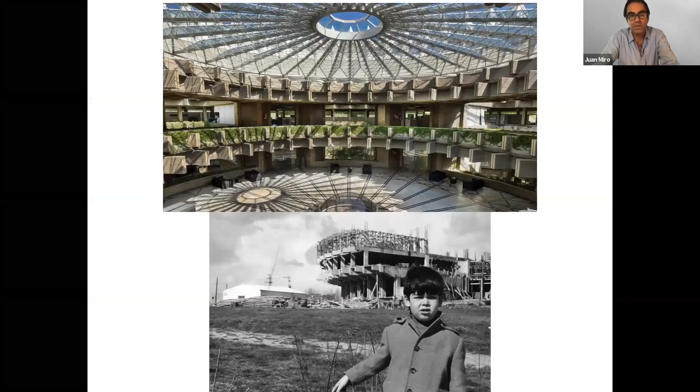The interesting thing about my father's influence is that he was European, very much influenced by Frank Lloyd Wright's modern version of architecture. He was an admirer of Frank Lloyd Wright and organic architecture, and applied that in many of his projects. He was also terrific at sketching and drawing. I love sketching, and I always thank my father because I grew up seeing all his drawings around. It's something I still value a lot - the sketching and the ability to express a project just by sketching. You can see here similarities with some of the interests Frank Lloyd Wright had.

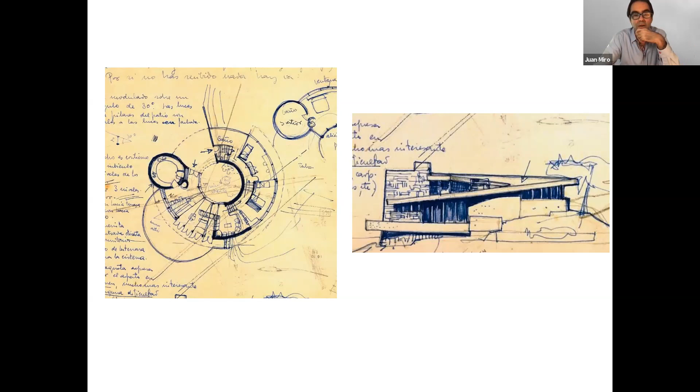And the email never came back, a return, because he basically was already in the hospital.

It's also a relationship that I value a lot, because both Gwathmey and Sorkin showed me a dimension of architecture that is different than the one you learn in the professional world. I think it's very important to be open-minded. When you're a student, you have professors who open up your mind to ways of thinking about architecture that aren't strictly the way you think about it when you're in the profession. I will thank Michael Sorkin for that.

Gwathmey was the architect I met also at Yale, and then I went to work with him in New York. I worked with him almost 6 years—a very important architect in the US. But the curious thing is that he was the American architect very interested in the European vein of modernism. So we have the European interested in American modernist ideas, and the American interested in Le Corbusier and the modernism that came with that. It was for me a very interesting combination, comparing all the things that accumulate as you evolve in your design and your thinking.

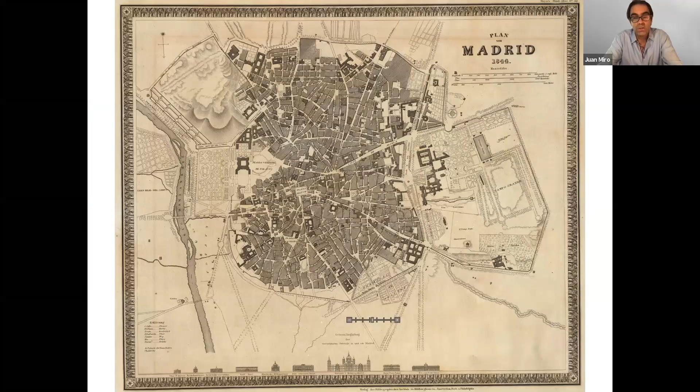There are many reasons for that, and this is one of the things I wanted to introduce to give you a sense of where a lot of the work comes from. When you think about a city like Madrid, this is how Madrid was when Austin was being founded and starting to grow. Madrid was very compact because it was a walled city, like medieval cities in Europe. It was walled, very dense, because it had to keep everything safe inside the walls. The city grew very dense, and it's obviously very attractive when you visit it now, because it has that picturesque sense of discovery. Order was created by carving it literally out of this very chaotic fabric, and it's part of the DNA of the city that remains to this day, building a city with higher density.

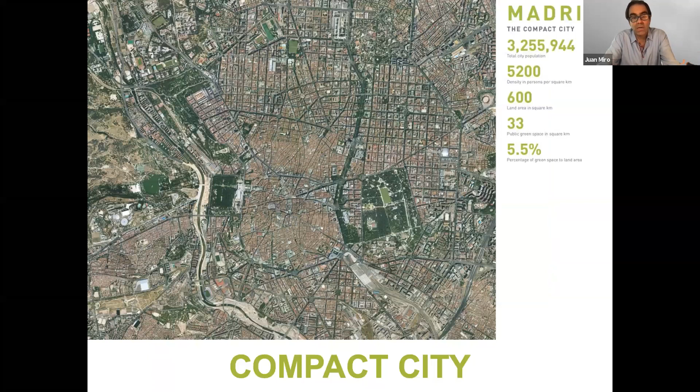So Austin and Madrid have very much the same surface, but in Madrid there are five times more people living in the same amount of space. So a landscape city like Austin has a central part, the downtown and the university, and then pretty much all around east, south, north, and west is like an urban forest that surrounds this central part.

And that has played a critical role in the work that we have done. So the work we have done, in a way, relates to the place that we are, and this city is different than all the cities. So a lot of the work that I'm going to show is more related to work done in Austin rather than other work. We do work also in other places outside Austin, outside Texas, but I concentrated on this for this lecture.

And the thing that also was typical in American cities is that there was a very reverential connection with nature. Nature was revered. What they built was very much trying to integrate themselves with nature, and nature was very much at the heart of every decision making about what they built and where they built it. So the pyramids were recreations of the mountains with temples on top, the same way that there were altars on top of the mountains. So there was a sense of reverence, connection, and integration.

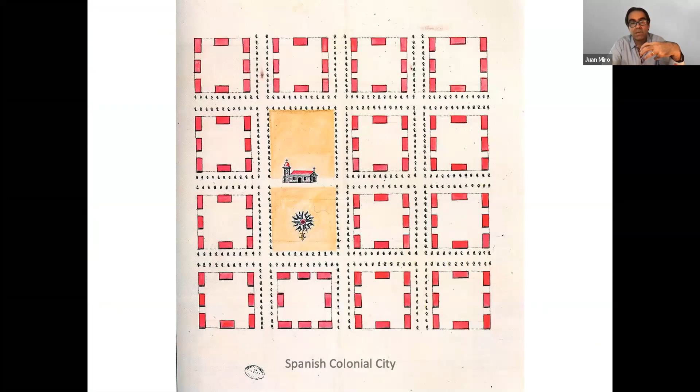So the cities were not closed cities. This is a very important thing, very different from European cities, which were walled cities. American cities, with exceptions along the coast in the Caribbean and Florida, were open cities. An open city meant it could expand into the landscape. This happened to cities all over the Americas, not only the US, even before the Spanish and the English arrived.

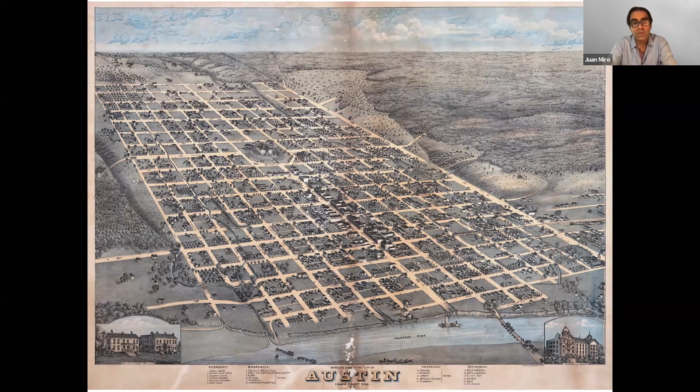So Austin was laid out with a grid too, a grid that can expand into the landscape. As that grid grows, it becomes the city that is now basically Austin. When you look at these early maps of Austin, you realize that since the beginning, Austin has been an accumulation of single family houses.

So single family houses have dominated the essence of the city from day one. There's a grid and the grid grows. And when that grid grows, it keeps blending itself with the landscape. And as it grows, it becomes planted with more and more trees. So the forest that is created with the city is not the forest that was there. This forest is created by the growth of the city. And it becomes a very attractive place to live.

And this was attractive before the pandemic, and is becoming even more attractive now when you think about the connection with this environment. So when you look at this, you say, well, I would like to see what it's like to be under those trees. And this is one of the things that we have done in the book, documented a lot of the windows into the fabric of the city.

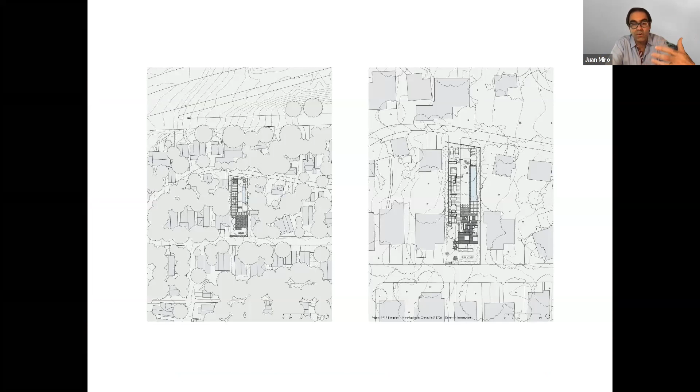When you look at this on the left, you can see a pretty dense part of the city, the older part of the city. And you can see that the lots are very narrow, but you can still create that moment of your own kind of Arcadia in the back of the lot. So for example, this house on the right is where my partner Miguel lives. It's a bungalow from the late 19th century. And then he added to it and worked around the trees.

So those images that you see from above is basically where people live under these trees. It could be very modest lots, it could be very large lots, it can be on a hilly part, it can be in different places, but it's a very strong connection with nature. And this is an opportunity that those trees allow.

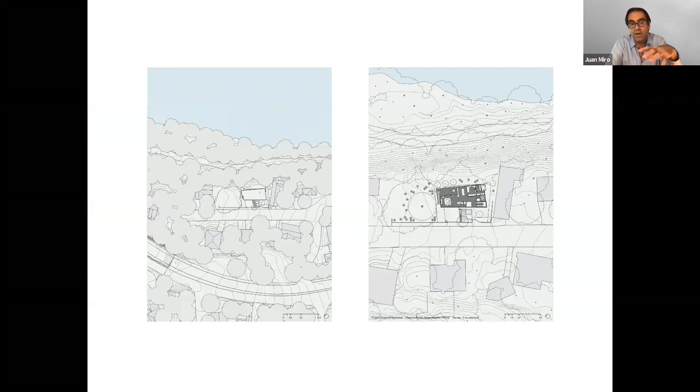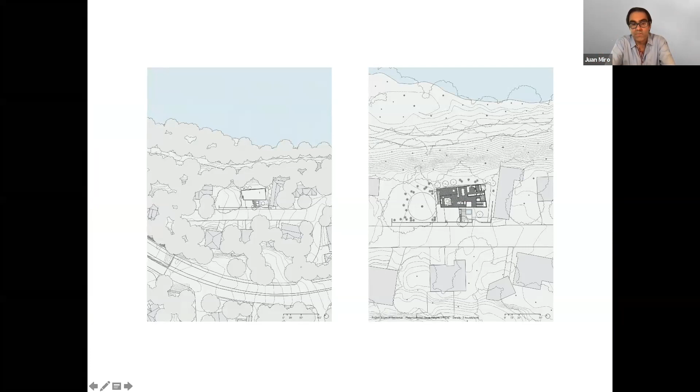So it doesn't matter if it's next to the river, small. This, for example, is an area of town that was surprisingly next to the water, but very modest houses, very small, very disconnected because there were not that many bridges across. And the ability to be immersed into that environment is one of the things that is very attractive about living here. So as I said, the houses can be very small, very modest.

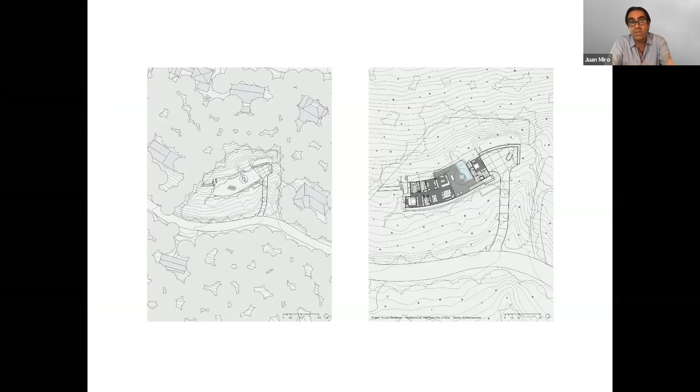It could be in hilly terrain. In this case, we had to build this following the contours, trying to save the trees, with very strong regulations to try to save the trees. So this is a very important part of building in these environments, that there are a lot of regulations to control what you do and what you can and cannot do.

So the ability to connect affects the way that you design these houses and the way that you have to respond to the specific conditions that you find. For example, this is my own house. It's not conventional around this neighborhood to have courtyards.

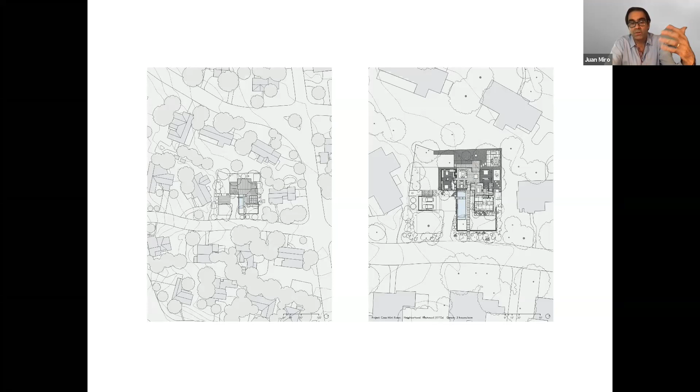We put walls on the front, and we created spaces that allow us to create that sense of privacy, the sense of connection with the trees, with the views. We frame windows, we use windows to frame that connection with the landscape. It's a very narrow, very shallow lot, so you have the ability to connect with that outside space.

And this is something that we do in our architecture a lot. How do you frame that particular view that gives you that sense of connection? You can have a painting, you can have a window like this, and it's basically creating that connection. You can do it also with a larger piece of glass, but when you have those trees, you want to have that connection as much as possible. You can use water. You have courtyards also wrapping around, but there is a sense that you are trying to take advantage of that beautiful connection that we have with the natural environment.

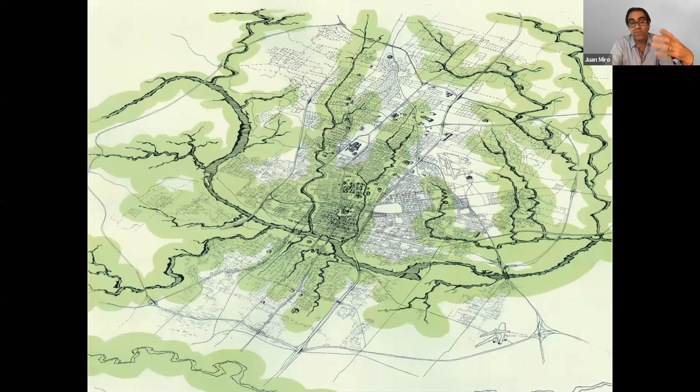The natural environment in Austin is very important in terms of the way it can be developed. There's a lot of floodplain issues, a lot of waterways. So the water is a very important factor. And when you think about the way the city grows and expands, the rivers and the flows of those moments create also great opportunities.

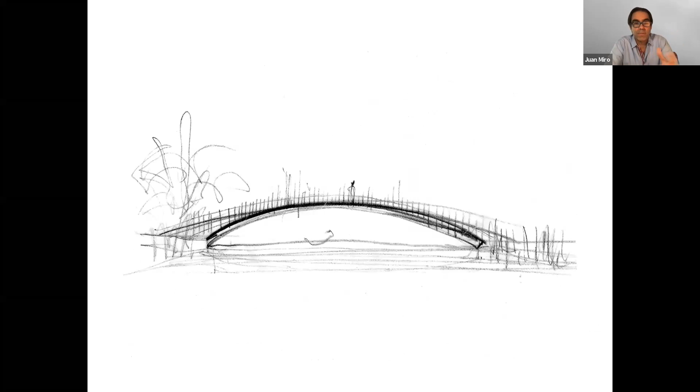The notion of lightness is indeed behind a lot of the thinking that we do. This next project is a good example. We had a very particular site where we had to connect two parts of a parcel with a bridge. These are some of the sketches done when you are thinking. I tell my students always think about how quickly a sketch gives you a sense of understanding of the place. When you look at this, this is the sketch that publishers like to publish, but I like the messiness of where it happened.

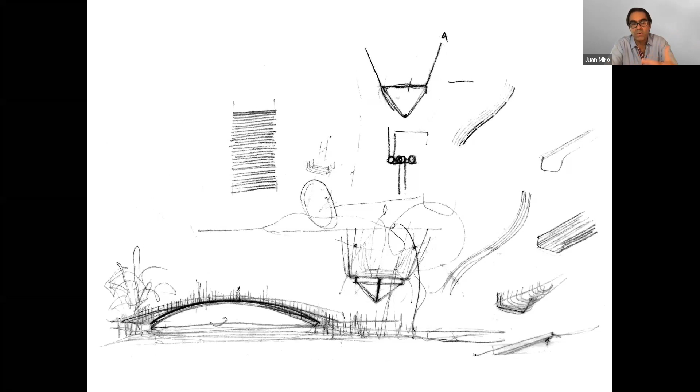This is what happened when we're having conversations. Miguel and I share a desk, we have an office together, and we can be sketching at the same time. Sometimes we're all sketching around the same sketch. It's a very informal process, but you get the thinking happening, and that becomes a reality. You try to maintain that sense of lightness, because the environment is very beautiful and you're trying to respect it and connect with a light touch.

So the notion of the light touch, this is all made with rebars. This is a learning lesson I had from my father. The space I showed you at the beginning, he used simple rods to build those trusses. And I said, well, we can use those same rods to build this bridge. So you don't know where the influence may come from, but sometimes that influence can be dormant in your head until the appropriate moment happens.

I like the evolution of how this changes over time, coming back ten years later, and the way it ages, the way nature starts engulfing it, and how its presence can be much more noticeable from one angle. When you see it sideways, it can disappear more. The vegetation changes dramatically—you can see that all of a sudden ten years later, but the presence of the bridge becomes even more mimetic. It feels like it's blending with its environment, like it's been there all along. That sense of lightness, we like a lot in terms of blending and integrating.

This is a bit the theme of the first part of the presentation, when I was talking about the effort of integrating yourself, trying to blend the pool and the water of the river, and then the bridge goes away, and it's a great moment when that happens. Then you go back another time of year, and the bridge's presence is there. There's a sense of lightness, but also a sense of presence. There's nothing better than that sense of human intervention in a beautiful landscape—it's a very beautiful moment, even when it's very subtle.

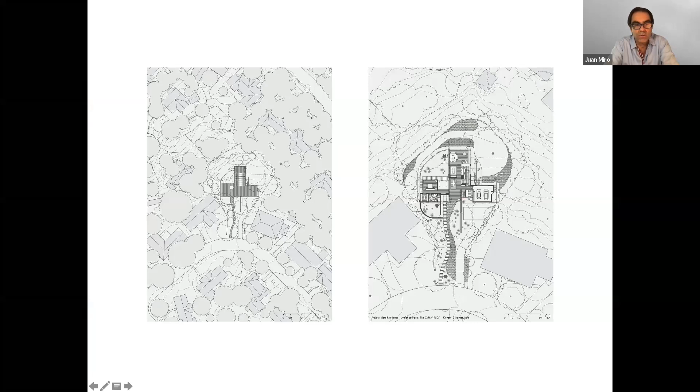I want to show how many houses there are around this one. There are a lot of houses all around, but you try to create that privacy with a wedge lot. So there's a big house on the left, a big house on the right, and you try to hide and create that space. Courtyards allow you to do that. Walls allow you to get privacy.

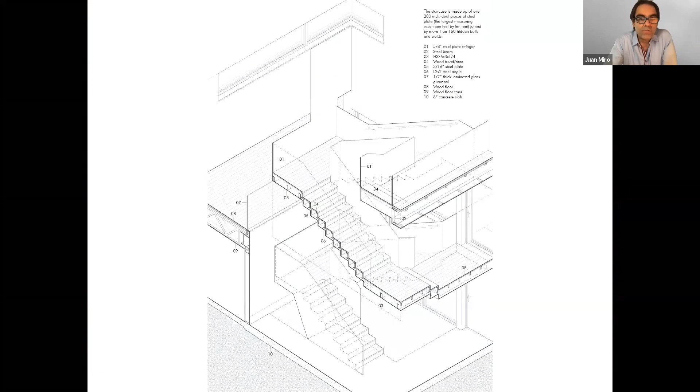And then you start framing the views, like the inside courtyard in this one—the notion of the stair as a sculptural element. This is something we included in the book, a lot of drawings that explain the technical aspect of how this is built. But you can see that the idea of creating your own private space, even if the houses are very close to each other, can be achieved with the use of vegetation and smart orientation.

And in this case, almost like the Mayan temples, you try to get above the tree canopy. So we did a room at the top here. This is the way you access the top—there's almost a reward at the end of this very sculptural stair that gets you to the top, and you have a fantastic view over the treetops, and you get that sense of almost like a forest that is an ocean.

It's basically a green canopy, constant all the way around the central part of the city. So when you look at this, you don't realize there are houses all around—it feels like the middle of a park. But no, it's all full of houses all around. This is one of the advantages of this urban forest, that it can make that disappear.

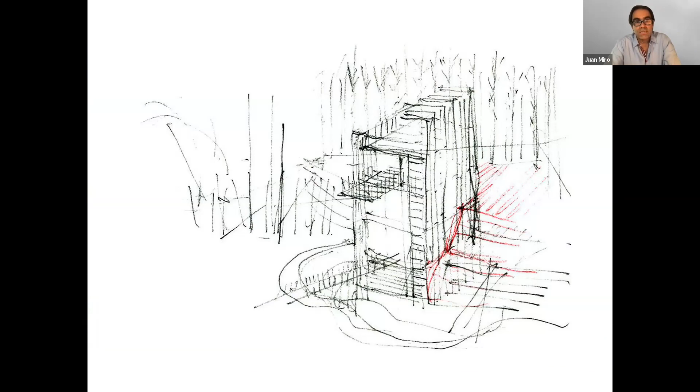This is another example of a house trying to top over the trees. This is the sketch that generated it, and you can see why this house is called Vertical House. This is the only project that is not in Austin, it's in Dallas, but a lot of what I said applies to Dallas and to most cities conceived in the 19th century in the US—these relationships are very similar there.

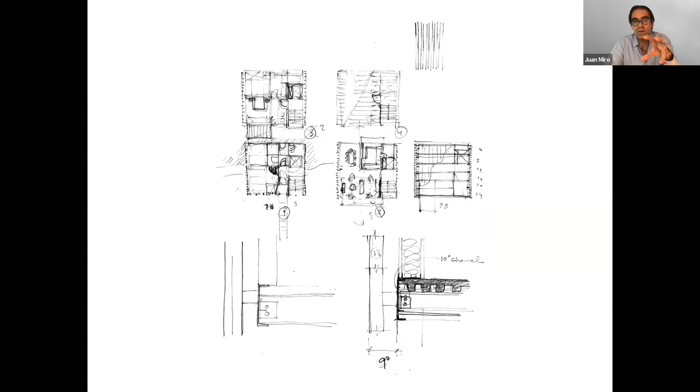The house is vertical to try to maximize that moment of getting above the tree canopy. I don't have time to get into a lot of details, but I wanted to emphasize sketching as a way to capture the essence. These sketches Miguel and I did after flying back from Dallas, after meeting the client, and the essence of the house was conceived in that sketch.

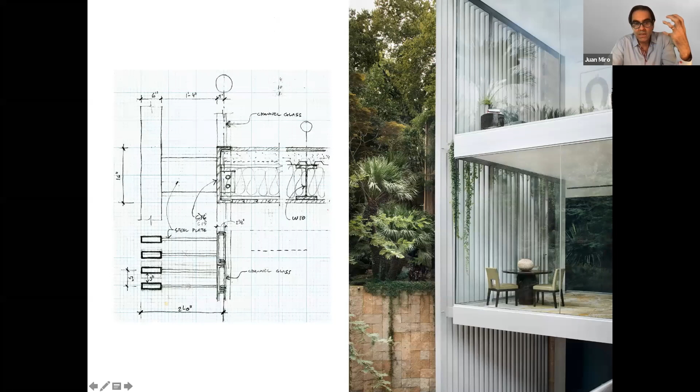So this is the effect. These are some of the drawings we included in the book—we did a lot of these to explain very carefully. The book is full of construction drawings that explain how this is built. It's like, how do you do this? When you look at the image on the left, that's the sketch that conceived it, but this is the final product. How we were able to do it is something we wanted the book to explain—there's a didactic component to that.

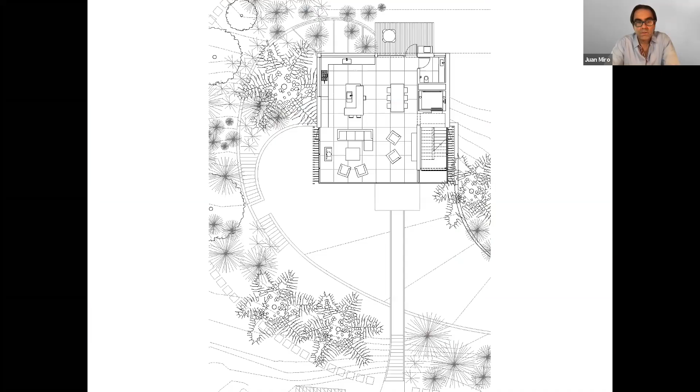So just to complement this, I wanted to say that cities need other things. You need your domestic spaces where you have your personal shelter, your refuge, your place to go back to. And then there are places where you need to meet with other people—in cities we need public spaces, pedestrian streets, meeting places, landmarks.

This is the other component that is now being shaken by the COVID crisis—we cannot meet the same way that we like to meet. There's a need for cities to complement this connection with nature with opportunities for people to do the other things needed in this kind of environment. So it is very much a learning experience.

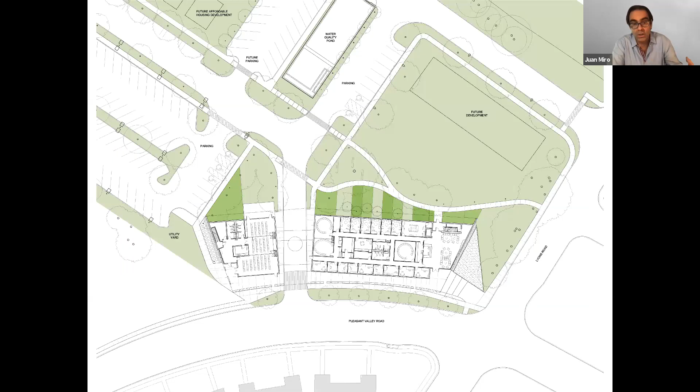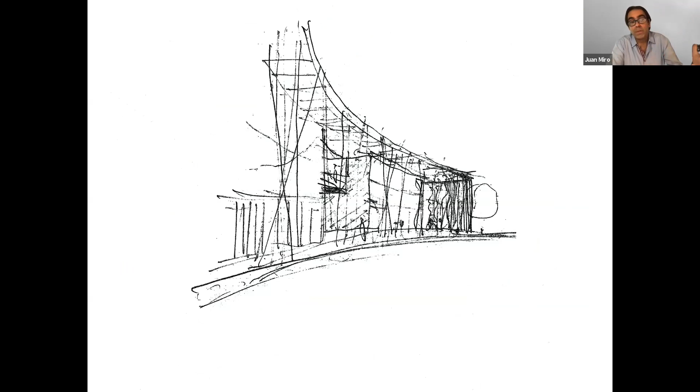For example, the city of Austin is learning how to build along the streets without pushing the buildings back with parking. This project is very much about emphasizing that connection—the idea of building the building to the street is the essence of this project. You can see how the building embraces the street and creates a very welcoming porch. This idea makes the building friendly to the neighborhood, but at the same time creates opportunities for people from the inside.

This is for a nonprofit doing work for very disadvantaged people, kids coming out of foster care. It gives them a place to meet outside. Even if you're in the city, you're connecting with those trees, that outdoor space. That's very important in our projects.

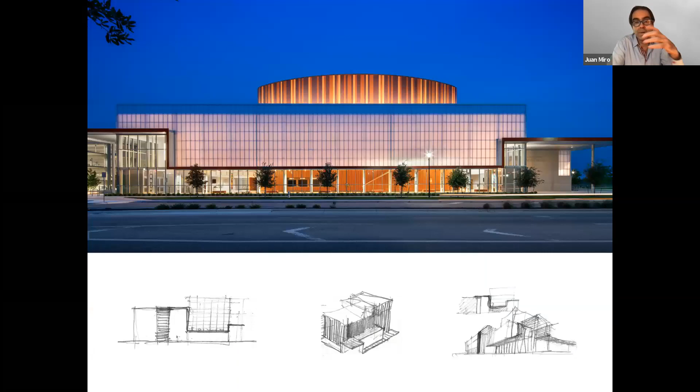Another moment where you can gather is for events, like a concert hall and auditorium for the public school system at Austin. This is in East Austin. These two projects are in the traditionally segregated part of town that is now being built on with new spirit. This is an institution that serves the whole campus, the whole city, but it's located in a place that was traditionally segregated.

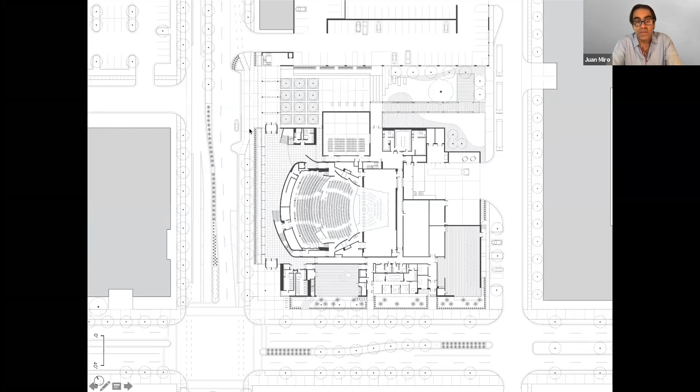It's very much about creating a friendly street where there is still nothing, because this building is happening on the former airport site. So the street is the main driver of the decisions here, making an access point from one corner, an access point from the other, and glass facing the lobby that gives a lot of activity, a very strong visual connection with the street.

You can see here the chamber itself is that volume that protrudes up. It becomes an iconic element in the new neighborhood. But from the street, you can see the activities happening. This is where people congregate. It becomes an exhibition space. It's a place where you can connect with students.

This is again for this public school system, so all the high school students perform here, and there's a need for these kinds of spaces. Unfortunately we cannot use them the way we'd like nowadays, but this is a very vital part of cities. Cities need other opportunities to congregate.

We had the opportunity to work on the big buildings around the Formula One track. This is another reason people congregate - to participate in communal experiences, whether concerts or a race. Think about the ability of this to attract people, not only from Austin but from all over the world. Thousands of people come from all over for these events, and millions watch it on TV. Providing this kind of background for people to congregate is another fantastic opportunity.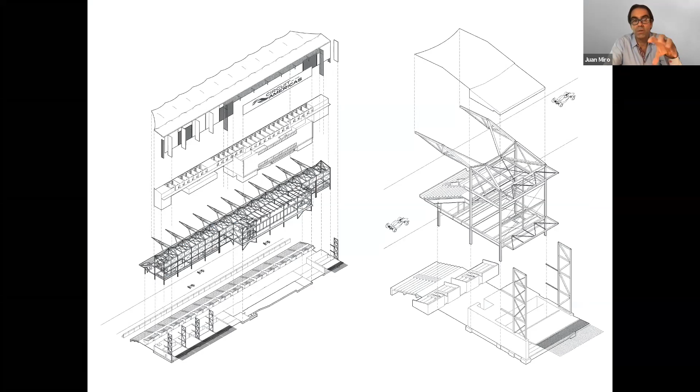The architecture reflects the spirit of the event - it's light. This is very much like what Mahesh was saying: performance is the key. Formula One cars are as light as they can be to do what they need to do, which is go as fast as possible. So this building is as light as it can be to do what it needs to do - it cannot be any lighter. Its lightness in steel means cost effective. If you design it well, you can be more cost effective because you've managed to make it lighter.

That's one of the things we're looking for specifically here. Lightness is good because, in the case of steel, its tonnage is reduced, and that automatically gives you the extra benefit of being more cost effective. You can create a lot of things with steel, creating light structures that you let deflect, and suddenly it can be much lighter than normal because you don't need columns at the end - you're accepting the deflection of the steel.

Gathering is very important for these events, and icons - you need iconic elements, that landmark, that reference. When you go to cities, you need that memorable moment where you can recognize and orient yourself, the moments where you connect with people around recognizable architecture.

That's what we wanted with this - to create an iconic moment that people will remember. It's on TVs, it has become the most Instagrammed place in the state of Texas. It's doing its job, and the main purpose was to create a sense of place. That sense of place, again, is generated by sketching and thinking, a lot of effort and a lot of work.

It is interesting when the essence of the idea can be reduced to a very strong sketch that can capture the idea of what is eventually being built. So you can see here, lightness was very important as well. This structure is basically based on the notion that you have repetition of elements, you can make them lighter, and you can make it strong that way.

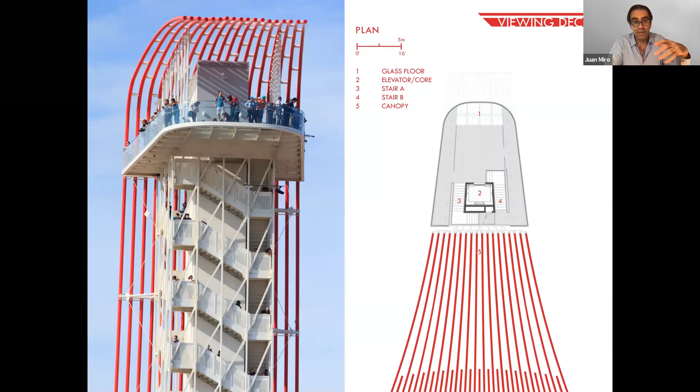And so we had to build this, and this is another type of drawing that we have done for the book specifically, so it's very detailed. It shows exactly how all this was put together, how it was built, and it was built very quickly. But again, with the notion of lightness as being your friend—making it lighter makes it more efficient.

and more cost effective. The glass floor, the notion of dynamic movement, the way that Formula One has embraced this as very connected with the race car, and the notion of high technology and the sense of Austin becoming a destination now worldwide because of the Formula One race and Moto Grand Prix and everything. So lighting becomes a very important element to create that iconic reference, and the sense of movement and excitement that this event brings.

So the last project I'm going to show, very much the last one, is a project that is almost the opposite—and this is what is fascinating about being an architect. You have to be working sometimes with completely different types of issues. So when you're working for a nonprofit, it's the lowest budget you can imagine—all the building I show you is the lowest budget that you can do, because the foundations will not give any money if they go above a certain cost.

This is as diametrically opposed to the Formula One racetrack as possible. It's a Hindu temple, and it's showing also how the city is growing. It's a destination for people from all over the world—a very inclusive, very cosmopolitan city—and the Hindu community here in Austin needed a place for school and a potential for growth, but a temple itself, also a temple and then a school. So you see the temple on the right, the school on the left.

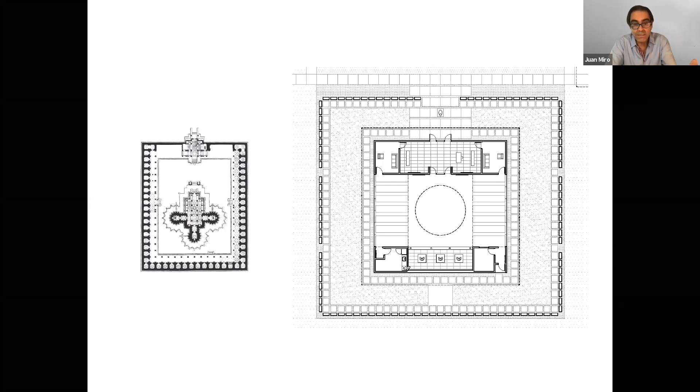And we needed to understand the process. For example, in this case, this is the ceremony the Swami of the temple had to do to ask for forgiveness from the Mother Earth for the digging of the foundation. So this is a very specific ceremony that takes place. You need to understand enough of the rituals, enough of what's going to happen there, and you respond to it. As architects, we have to constantly get into someone else's shoes to understand what they're looking for and what is important to them. So in this case, we created a courtyard made out of blocks of limestone—very simple blocks, very cost effective from the quarry, just dropped there. A beautiful way to create an enclosure that is part of the ceremonies they do before entering the temple.

We did 108 blocks, which represent the 108 poses of Shiva, the god. This was a very important opportunity for this community to raise money. All these plaques were available for families to donate and be recognized. You need to accept that these things are going to happen, but it's very beautiful that we were able to have the 108 poses of Shiva shown in these plaques. It's really rewarding when you have to make these adjustments.

I always say our firm, Miro Rivera, is not specialized in any kind of work. We work from residential to high rise. It's very unusual in the US. My father told me that you can do those things. In Spain it's more common, not as common here in the US, but it's something we have fought hard to maintain, the ability to do any kind of project. As long as the project asks for design, the budget is not important either. This was also very low budget, but we were able to do all the things we were looking for.

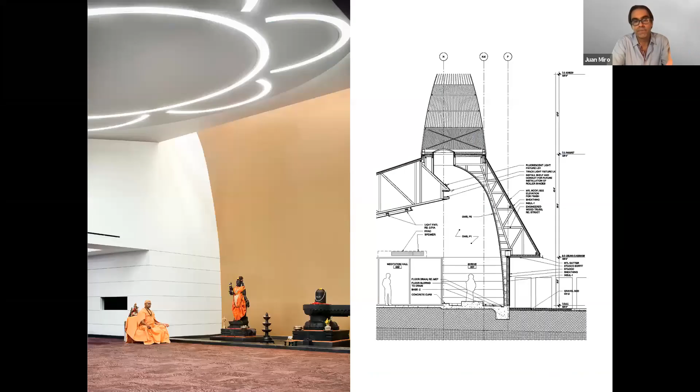For example, the most sacred part of the temple is the highest point, so the altar itself has to be the highest place on the building. We wanted the light to wash down from that point above the altar piece. This is something we learned, the Swami was very effective in conveying to us.

Another of the drawings explaining the construction. We think it's a great opportunity for students to always see how things get built. It's something we take very seriously, and we enjoy very much that process.

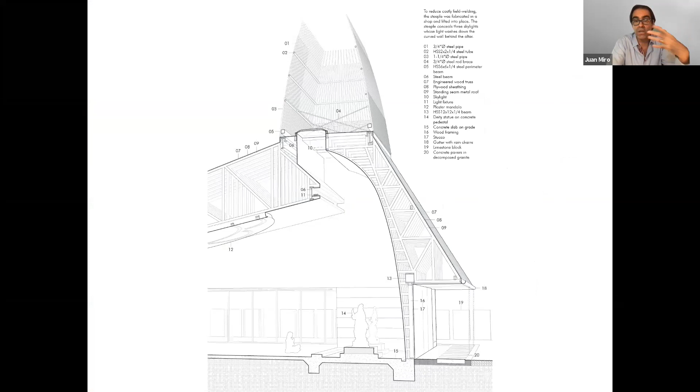For example, when we put the cap on top of this space, the steeple, this is designed with galvanized piping that is used for fencing. This is a company that does fences, the most mundane aluminum fences you can imagine. We went to them and said, hey, we have something we want to do with you, would you? And we did it in one single fabrication, then put it on top with a crane.

It was beautiful when we saw that the pipes were made in India, so you can see that we live in a globalized world. We saw the print on the tubes that said India. This is the way this inspiration from these temples in India came through.

And so the notion of how these places become the places for our cities, for Austin, for this Arcadia, all these people that come from everywhere. I'm an immigrant, I came and made my home here. All the people that come and make their home in Austin feel like this is the place where I can prosper, where I can do what I do, whatever that is. The gatherings, the spaces where people gather are as important as the private spaces where people live.

This is the last thing I'm going to show, just to say that Austin can become a model for the sustainable and inclusive city, something I wrote recently a couple weeks ago, to show that there is a model for a low density city that can be very much a sustainable and inclusive city. This is not necessarily the most common position in academic circles, because there's a little too much of an obsession with density as the panacea for all the maladies of cities. I think it's losing sight of the DNA of different cities, different cities are different, and we cannot apply the same methods everywhere. Austin, I think, is doing a good job maintaining a very good balance of making forward-thinking, sustainable development while also making it a very inclusive place.